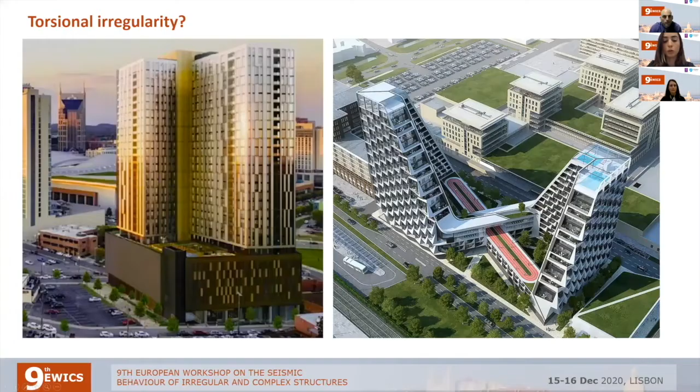Thank you very much. I am Juan Carlos Reyes, associate professor at Universidad de los Andes in Colombia. My other co-authors are Luis Ardila and Maria Paula Moreno, who were my students. I'm going to talk about the evaluation of torsional parameters in seismic code provisions for multi-story and asymmetric plan buildings.

This is work I presented some advances on in the last workshop. This time I'm going to present the full research we did.

So the first question here is how we qualify torsional irregularity in a building like the one shown on the left, or even this one here. What kind of parameter should we use to quantify if this building is classified as irregular in plan, or if it has torsional irregularity?

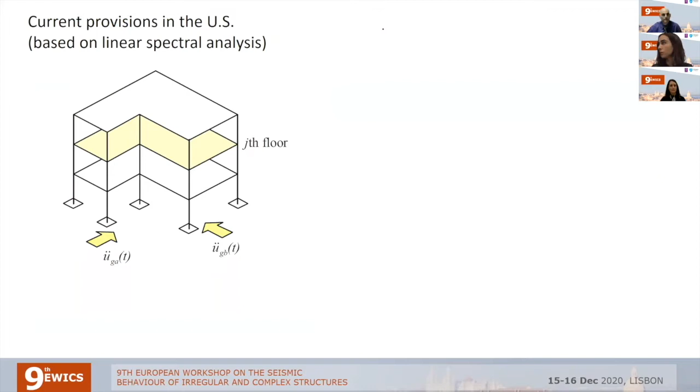Going to the current provisions in the US, those provisions are based on linear spectral analysis. When you have a building like this, you take, for example, the j-th floor shown in yellow, and this is like the deformed shape of that floor. If you plot the next floor, you can measure the drifts between the two floors, and you will see a minimum drift on one side and a maximum drift on the other side.

So you could calculate a factor to quantify the level of torsion. I call this factor alpha, just to put a number and a name to it. It's calculated as the maximum drift divided by the average drift, the average between the maximum and the minimum.

With this factor, the code quantifies the level of torsion using the following ranges. If you are between 1 and 1.2, you will have no torsional irregularity, but just after 1.2, you will have torsional irregularity in this range, and then extreme torsional irregularity for the last range. So this is the kind of decision we can make to quantify the level of torsion in this code.

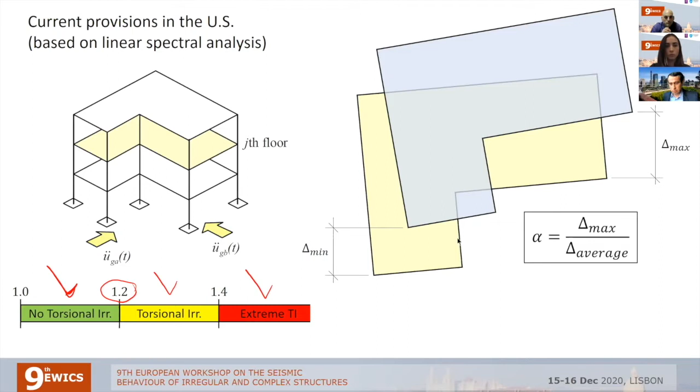Also, the accidental torsion is affected by this decision. This factor AX is defined in the code to increase the accidental torsion. If I plot the numbers, you have 5% accidental torsion for buildings with no torsional irregularity, and then it increases after that. For example, 1.4 alpha will be associated with 6.8% accidental torsion. That's a torsion we need to add to the other torsion the building already has.

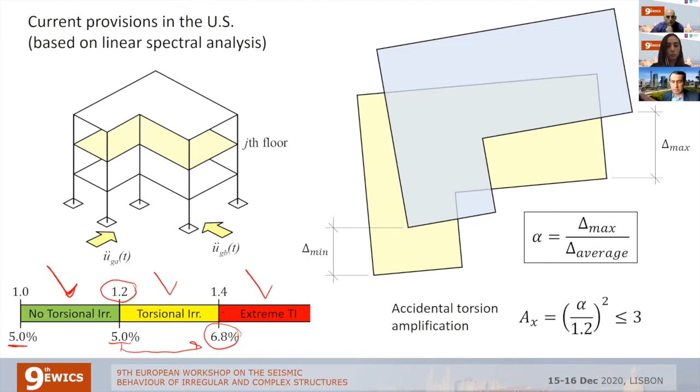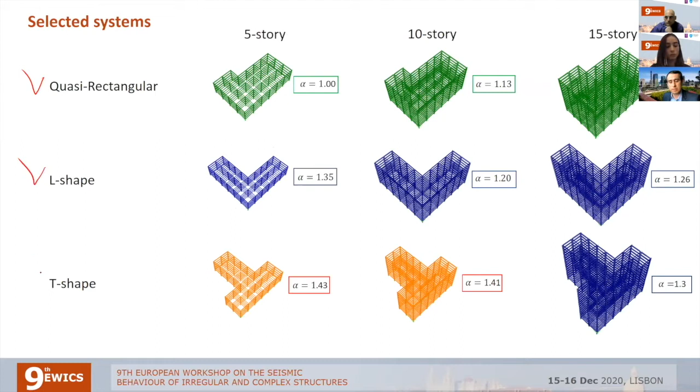To evaluate this parameter, we selected the buildings shown here. We have some rectangular buildings, some L-shaped buildings, and some T-shaped buildings of 5, 10, and 15 stories.

Here I'm writing the alpha number. As you can see, all the buildings in the first row don't have any torsional irregularity, but the buildings in the second and third rows have some, and especially those at the bottom, we have extreme torsional irregularity with an alpha factor larger than 1.4.

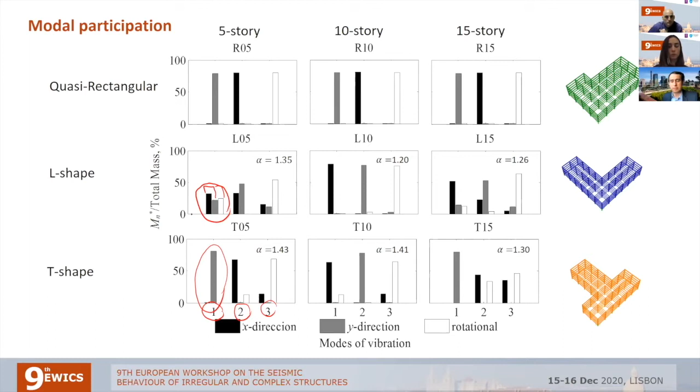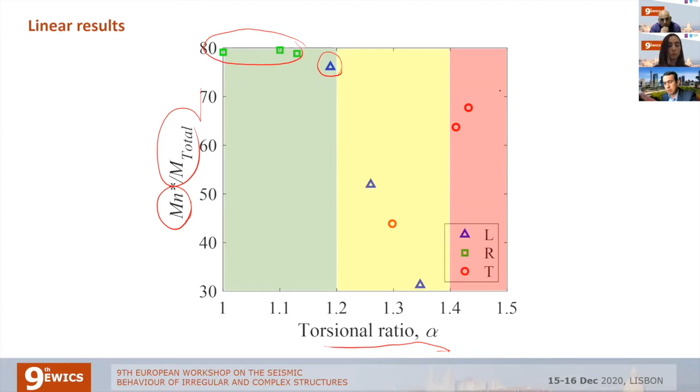So first we try to use this result as a parameter to quantify torsion. Plotted here is the first mode effective mass against the total mass, on the horizontal axis is the alpha factor. You will see that the rectangular plans are well aligned here with very large participation mass, and even this L-shaped building with no torsional irregularity is still okay. But when you go to the other buildings, you will not have a clear trend. You will see somehow that participation is lower for the first mode, but it's not a very easy parameter to evaluate the level of torsion in a building.

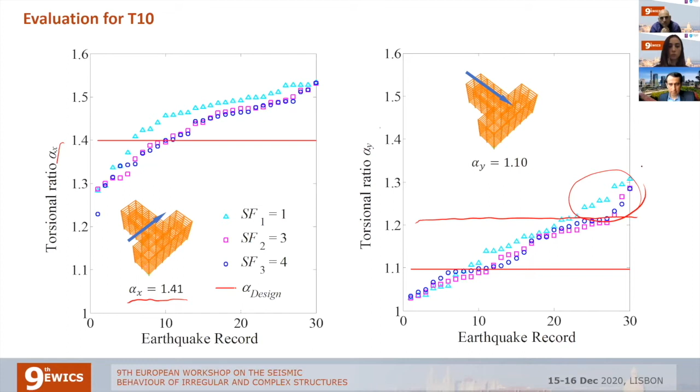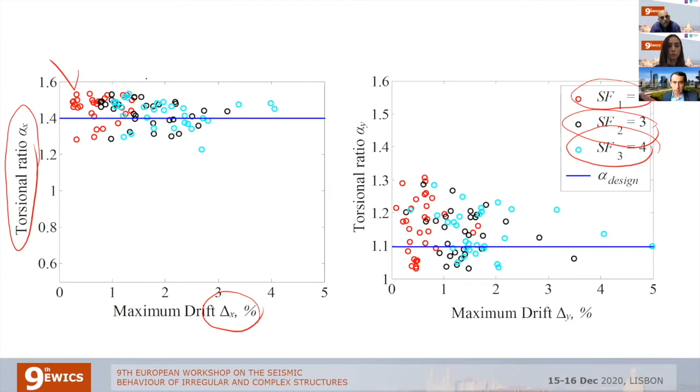So here I'm also plotting the same information for the other direction. In this one we have a little more dispersion, but again you will see that the values cluster around the one calculated using linear analysis.

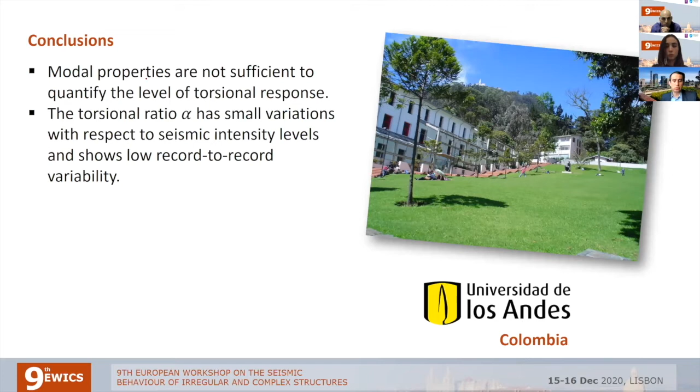So in conclusion, modal properties are not sufficient to quantify the level of torsional response, and the torsional ratio alpha has a small variation with respect to seismic intensity level and shows low record-to-record variability. Because of this, we consider this torsional ratio alpha adequate to identify plan irregularity of multi-story buildings. These are the main conclusions. We have done this for all the buildings, but only showing here the T10, which is one of the most critical ones. Thank you very much for your attention.

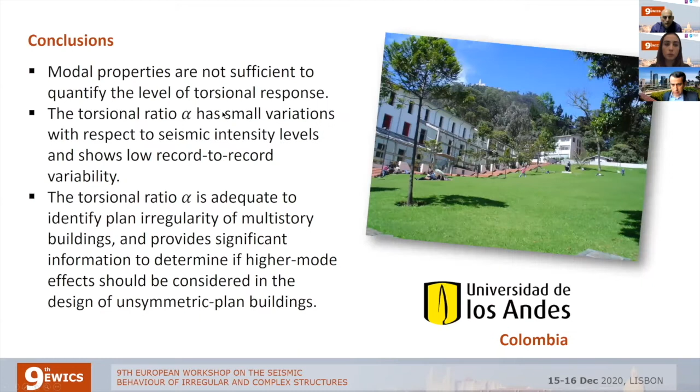Yeah, the structures are nonlinear. Like you see, okay, we here at the beginning, let me go here. We try different intensity levels, so we try a scaling factor of 1, which is mostly linear, but then this scaling factor of 3 and 4 will take the building very far into the inelastic range.

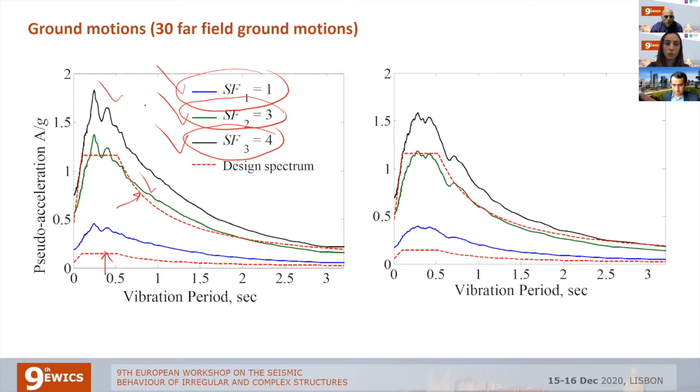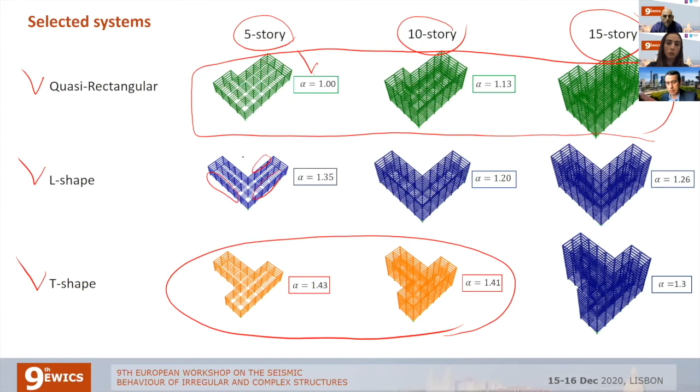So how is the strength distributed in these cases of nonlinear? The buildings are steel frame buildings, and they have some frames in the perimeter, as is usually done in the US. So all the plasticity comes from the yielding of the frames, especially beams and some columns in those frames. Okay, thank you. Perfect.

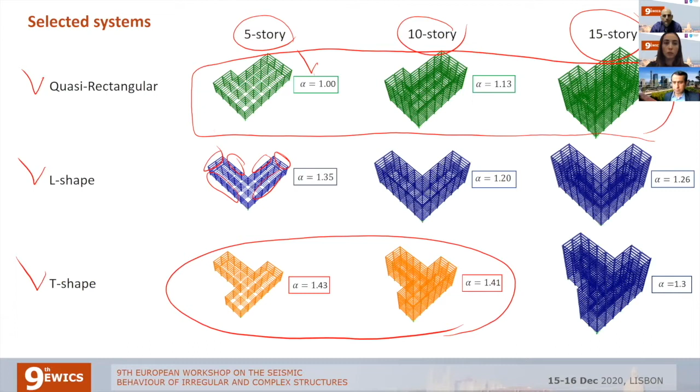And for these buildings, you only consider the irregularity in plan. You didn't consider the irregularity in height, or did you model the infills for these case studies?

Yeah, in this case, we were interested only in torsional irregularity in plan, so it's restricted to in plan. That's why we are using this alpha parameter here, which only includes the level of torsion in plan. And we are not including the effect of the infills. Usually in the US, at least, these steel buildings have partitions that are not fragile, so we are not including that effect here.

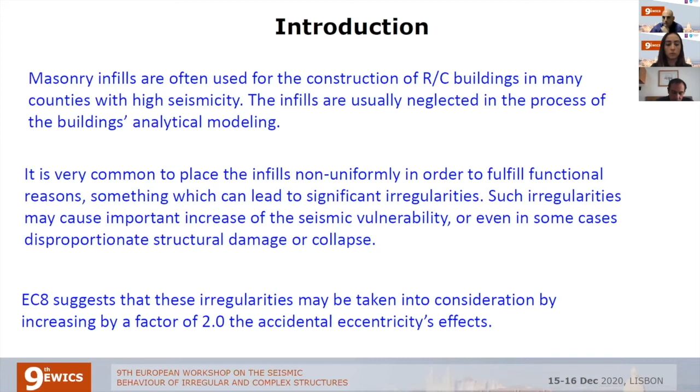In the present paper, the need to increase accidental torsion in nonlinear seismic analysis as a parameter to capture the effects of infill irregularities is further investigated through the evaluation of a multi-story 3D RC building with irregularly placed masonry infills. The seismic assessment of the building is carried out using the nonlinear pushover analysis according to the Eurocode 8 provisions.

Two different structural models are investigated: a model taking into account the masonry infills as diagonal struts, and a model without taking into account the infills, but increasing by a factor of 2 the accidental eccentricity as Eurocode 8 proposes. Then a comparison between the two models is carried out in order to examine the effectiveness of the accidental eccentricity in capturing the effects of irregular infills.

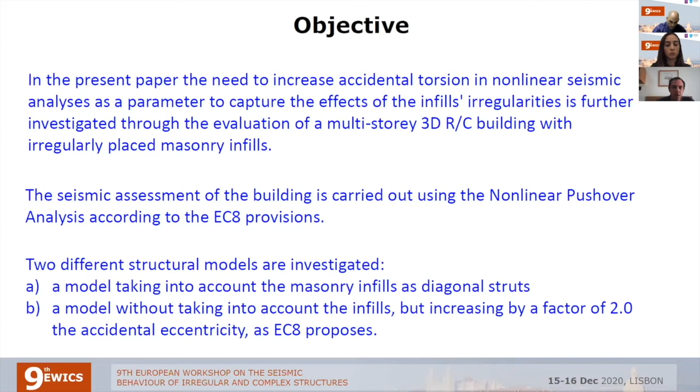The main load-bearing structure consists of beams, columns, as well as a reinforced concrete core wall. The foundation of the building consists of individual footings and connecting beams.

For the modeling of the building, all basic recommendations of Eurocode 8 were taken into account, and the building was analyzed by means of nonlinear pushover analysis as defined in Eurocode 8. In order to model the nonlinear behavior of the structural elements, plastic hinges were placed at the column and beam ends as well as at the base of the walls.

The properties of the plastic hinges were defined according to the code provisions of Eurocode 8 and the Greek Code of Interventions, KAN.EPE. The masonry infills were modeled according to the provisions of the Greek Code of Interventions. More specifically, each infill was modeled as an equivalent hinged diagonal strut in compression with a given width. The mechanical properties of the infills were estimated using the mechanical properties of the bricks and mortar and taking appropriately into consideration the method of masonry construction.

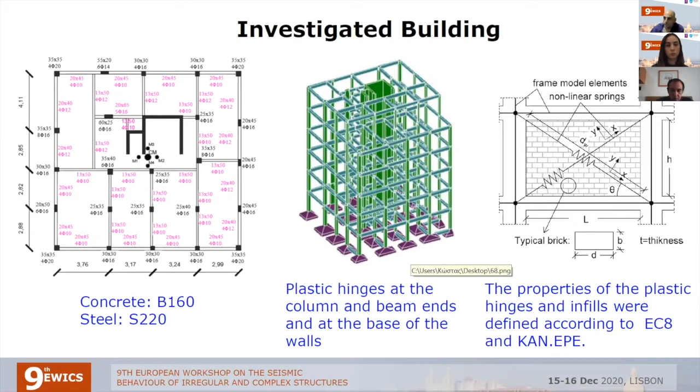The building was assessed using the non-linear pushover analysis according to the Eurocode 8 provisions. The following different structural models were investigated. First, a model without taking into account the infills and using the value of the accidental eccentricity proposed by most seismic codes, that is 5% of L, where L is the floor dimension perpendicular to the direction of seismic action.

A model without taking into account the infills but increasing by a factor of 2 the accidental eccentricity. Two models with masonry infills distributed irregularly in plan in such a way that asymmetry along the x-axis is caused, and taking into account the infills effect as diagonal struts according to the modeling procedure presented.

And finally, two models with masonry infills distributed irregularly in plan in such a way that asymmetry along the y-axis is caused, and taking into account the infills effect as diagonal struts according to the modeling procedure presented.

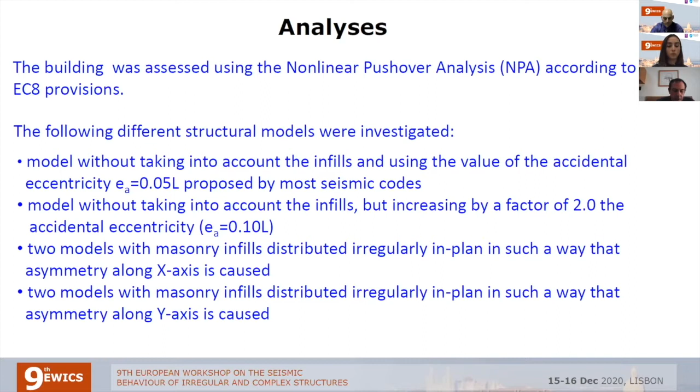The above structural models were subjected to nonlinear pushover analysis, and all the structural elements of each model were assessed for bending and shear according to the provisions of Eurocode 8.

For the nonlinear pushover analysis, the following assumptions were made: limit state of significant damage, knowledge level of normal knowledge, horizontal elastic spectrum as defined in Eurocode 8 for PGA of 0.24g, two different lateral load patterns, uniform and modal, target displacement according to Annex B of Eurocode 8.

Assessment of the capacity of each structural element according to Annex A of Eurocode 8, Part 3, and the combination of the effects of the seismic action components according to the Greek Code of Interventions.

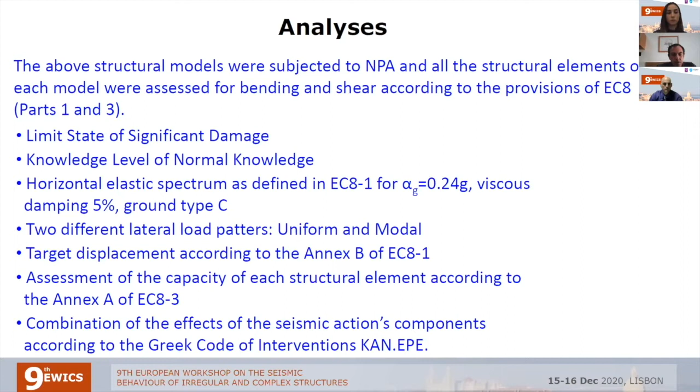However, the increase is rather small. The analysis revealed that the number of shear failures is much larger than the number of bending failures, something which was expected since the investigated building was constructed according to old codes without seismic provisions for capacity design.

Practically no difference has been noticed between the models with small and large infill irregularities. Now, considering the comparison between the models with accidental eccentricity of 5 and 10%, it can be seen that when the accidental eccentricity is multiplied by a factor of 2, as Eurocode 8 proposes, the damage is more severe. However, the difference between the two models is rather small.

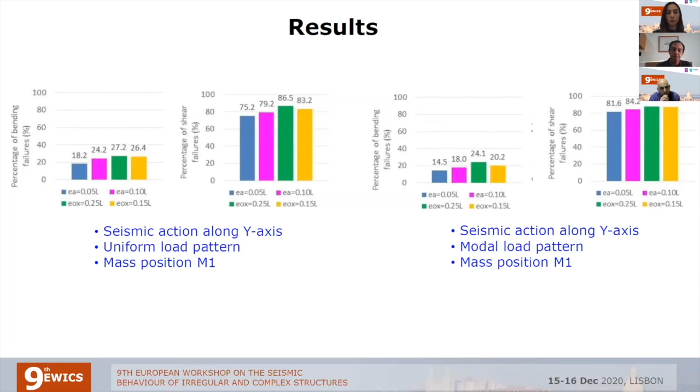Now, based on the results of the study, the following general conclusions can be drawn. In most cases, the consideration of the irregularly distributed masonry infills in the structural modeling leads to a larger number of bending and shear failures. However, the increase is rather small. Moreover, practically no difference has been noticed between the models with small and large infill irregularities.

The increase of the accidental eccentricity by a factor of 2, as Eurocode 8 proposes, leads to more severe damage for the studied building. However, this provision of Eurocode 8 was proved to be effective up to a point, since it failed to capture adequately the effects of the irregularities in the infill distribution for the investigated building.

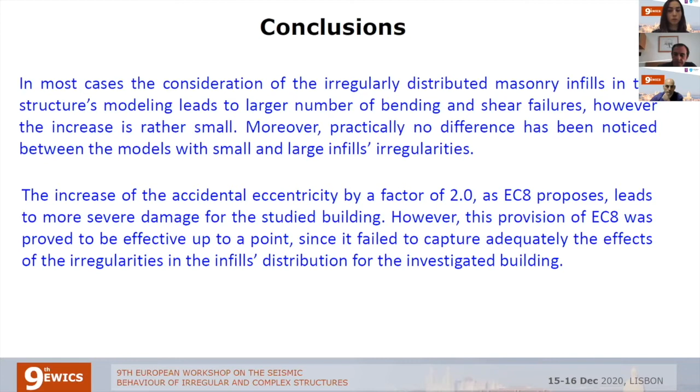Thank you very much for your attention.

Thank you for the presentation. I have not seen any questions in the chat, nor anyone raising his hand or her hand. Does anyone have any questions about this presentation? If not, then I will ask a quick question. Yes.

So the structure you considered is highly irregular in plan. How do you think the conclusions would change if the structure was symmetric, for example? Because the accidental eccentricity doesn't add too much eccentricity to this specific structure, whose built-in eccentricity is very high. But a small eccentricity added to a structure that is symmetric, for example, may change the results more considerably.

Yes, you're right, it depends on the structural eccentricity. But I don't know what would be the result in this case. I think that the problem is very much parametric, so much more research must be done in order to come to reliable conclusions, because the distribution of the masonry infills is chaotic, I think it can be very chaotic.

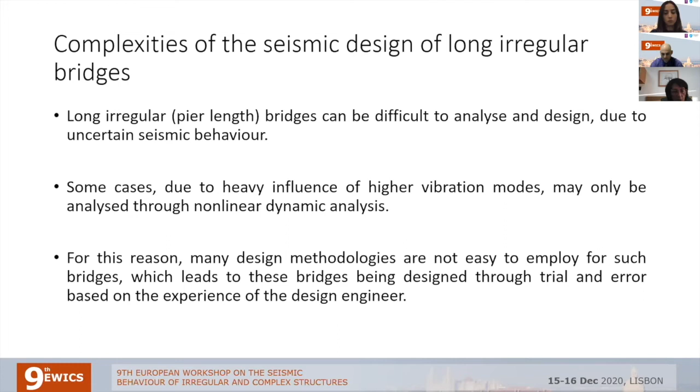When designing a structure, one attempts to optimize some aspect of the structure, even if implicitly. Implicitly we attempt to either maximize resistance, but without using too much material, and usually these two and many other possible objectives are done implicitly and sometimes even explicitly when designing structures. So it makes sense to apply multi-objective techniques for structural optimization due to that implicit goal.

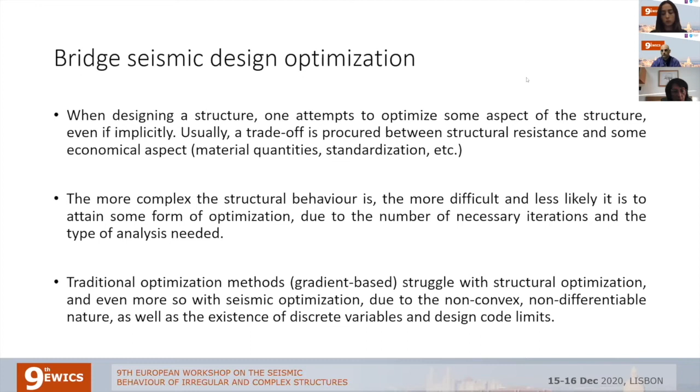So why genetic algorithms for seismic design? In essence, genetic algorithms are meta-heuristic methods that allow achieving optimization, and are good to apply to seismic design and structural design, because

traditional optimization methods aren't usually very good to apply due to the non-convex and many times discontinuous nature of the optimization problem. And these types of algorithms have no trouble with discrete search spaces due to discrete variables, due to non-convex shapes of the optimization problem.

And so this can be applied, and they are especially valuable for multi-objective problems where you want to obtain a trade-off between different objectives. So if you want to optimize at the same time towards performance, but also towards cost, these two objectives are not easy to optimize at the same time. Usually one contradicts the other. And so these types of solutions are useful in those cases.

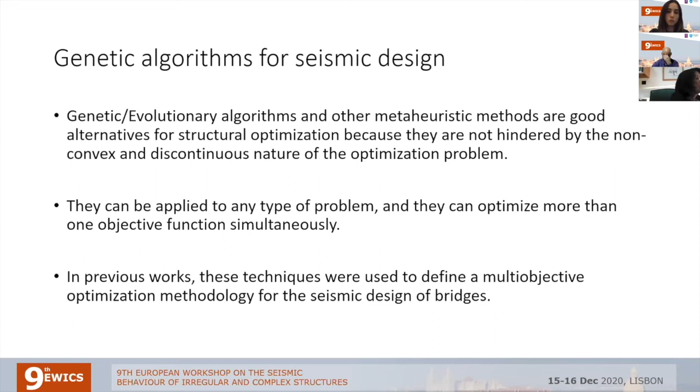So in this case, what we did was we applied these optimization techniques to a case of a long irregular bridge, and this type of bridge is particularly complex because they have short central piers, and they tend to have a transverse horizontal displacement profile that is different than the usual parabolic first mode shape, and so they have a lot of influence from higher modes.

As said in this work, the objective is to apply these techniques and use the search history for knowledge or rule extraction. And the decision variables, or rather the design variables used in this instance were pier diameter, flexural steel reinforcement, and pier deck connection. And what was done was dividing the piers into groups that were somewhat similar in terms of pier location and pier size. And so those piers, in those four groups, have the same design.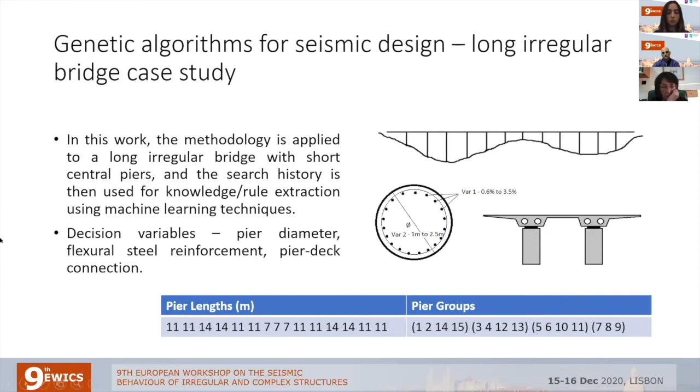And then the optimization algorithm, what it will do, it will test a lot of different combinations and a lot of different solutions of bridge instances with this initial typology, and will compare them based on two fitness functions that are on the one hand performance, and the performance here is the comparison of the concrete admissible strain at each pier versus the concrete strain that sets in at any point in time of the seismic action.

So the method of analysis was nonlinear dynamic analysis with real strong motions, and to deploy this, OpenSees MP was used, and the reason why the OpenSees MP, the variation for parallel processing, was used was exactly due to the huge amount of analysis that had to be performed to obtain this final result.

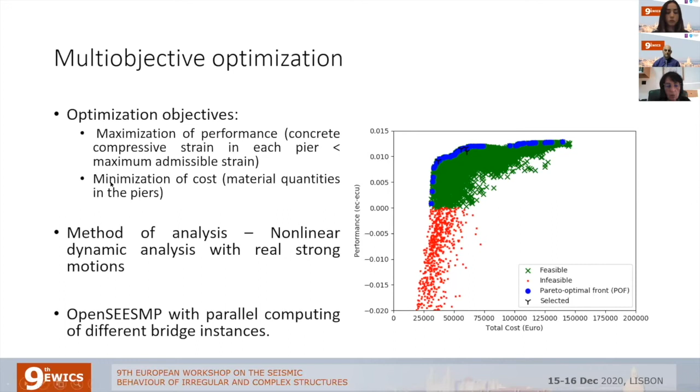To get a grasp on why this is interesting, particularly for nonlinear, irregular structures, and in this case long irregular bridges: many times when designing we don't get the opportunity to search a lot of different variations in the design, and this allows us to catch different schemas for design.

We can see that there were two ways of designing this bridge that gave good results. We can either decide to place fixed connections in the middle short piers, or do the other way around, with monolithic connections on those piers and have the others fixed, playing with the amount of flexural steel placed in each situation.

We have two different approaches that basically arrive at a viable solution. This is interesting because it allows us to explore other solutions that are not as obvious, walking away from what is expected, and this allows us to gain insight many times on what is behind certain structural behaviors.

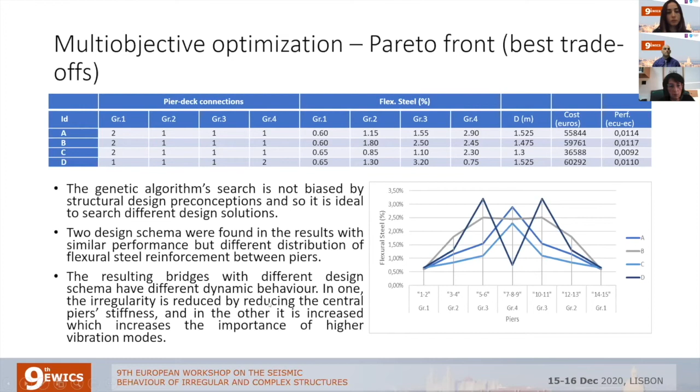Going further than only analyzing the solutions given from the Pareto set, one can do something more interesting: after these analyses we have tens of thousands of bridge instances that were tested. Some failed, some managed to be feasible, and if we apply, for example, classification trees...

We are able to see which variables or features are more significant for the resistance of the bridge, and in which cases. We can clearly see which characteristics are more significant for knowing if a bridge is going to be feasible or not.

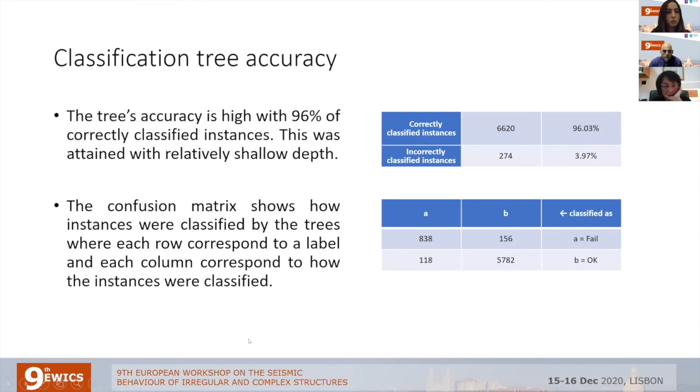This essentially shows that the features that were generated and that the algorithm then selected are actually capable of accurately separating the two labels of pass and fail.

So thank you for your attention.

Thank you very much for the presentation. We don't have too much time. If anyone has a quick question - no.

Okay, so we can pass on to the last paper. It will be a video presented by Grigoris Manoukas, presenting the paper 'The Slenderness of Building in Plan as a Structural Regularity Criterion.'

Of the slenderness of floor slabs in order to categorize buildings as being regular in plan. This criterion aims to ensure that the floor slabs behave as rigid diaphragms and are able to transmit and distribute the lateral loads to the vertical structural elements.

The objective of the present study is the evaluation of this structural regularity criterion as adopted by the current version of Eurocode 8 and as revised in draft 3 of the new version of the code.

The deformability of floor slabs depends on several parameters, such as the slenderness of the plan, the slab thickness and shape, the configuration of the lateral load resisting system, the relative stiffness of the vertical elements to the in-plane floor stiffness, and the size and distribution of openings.

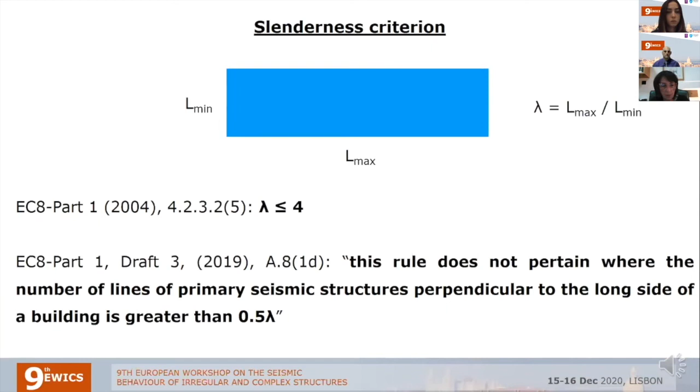In order to evaluate the efficiency of the aforementioned criterion, a total of 36 reinforced concrete buildings with various floor plans, number of stories, and structural configurations is examined.

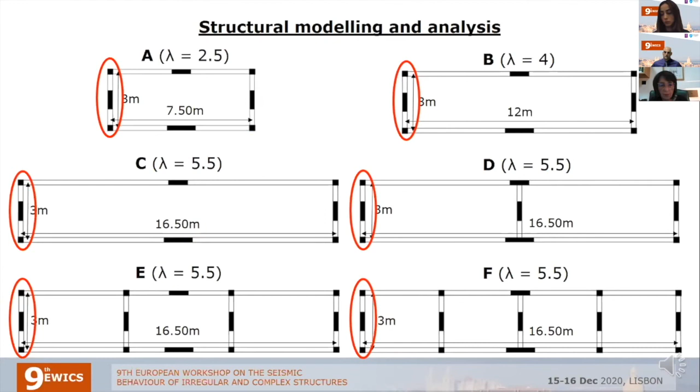Each building is characterized by a string symbol comprising one letter and two numbers separated by a dash. The letter A to F indicates the floor plan of each building. The first number, 2 or 4, indicates the number of stories. The second number, 1, 2, or 10, is a modification factor used for the amplification of stiffness of the dual plane lying at the left side of the plan. For example, the symbol F2-10 corresponds to a 2-story building with floor plan F, in which the actual stiffness of the vertical components lying at the left side of the plan is multiplied by 10.

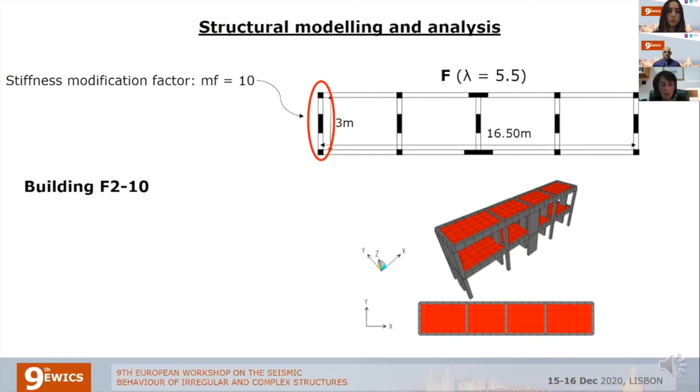The thickness of all slabs is equal to 15 centimeters, which is the usual dimension in common buildings in Greece.

For each building, 2 alternative options for the simulation of their in-plane stiffness are adopted. Firstly, rigid diaphragms, utilizing the relevant feature available in the software used. The story masses along the horizontal axis, as well as the story mass moments of inertia around the vertical axis, are concentrated in the geometrical center of the plan.

Alternatively, 4-node shell elements are used, which is considered the exact modeling option. The story masses are uniformly distributed on the slabs. The dimension of the square-shaped shell elements is 75 centimeters, although a coarser discretization mesh would be adequate for the estimation of horizontal displacement. This choice ensures that the nodes of the discretization mesh include all connection points of vertical structural elements with the diaphragms.

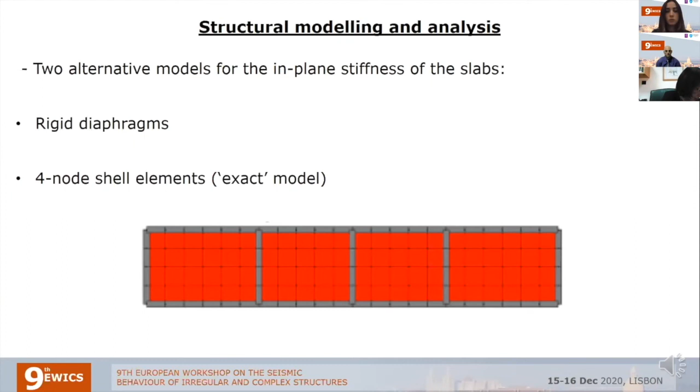In order to identify whether the rigid diaphragm assumption is reliable, the relevant criterion adopted by Eurocode 8 is applied. In particular, the diaphragm is taken as being rigid if, when modeled with its actual in-plane flexibility, its horizontal displacements nowhere exceed those resulting from the rigid diaphragm assumption by more than 10%.

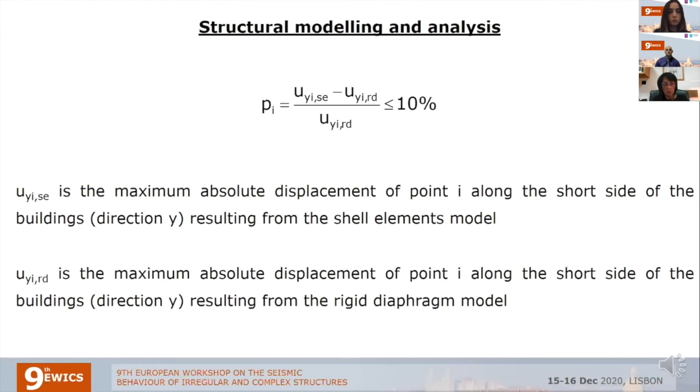For the application of this criterion, the percentages of displacement exceedance, PI, for each point I of a diaphragm are calculated from the relation shown. The maximum value of PI for all points of a diaphragm, max PI, is compared to the limit of 10% prescribed by Eurocode 8. A negative value of max PI means that the rigid diaphragm assumption is conservative. A positive value of max PI below or above the limit of 10% means that the rigid diaphragm assumption is acceptable or unacceptable, respectively.

The displacements of each point of the diaphragms are calculated by means of the modal response spectrum analysis method. Given that, according to the aforementioned criterion, only the relative values of displacements resulting from the two alternative models are important, the use of a typical code response spectrum is not necessary.

Hence, in the framework of the present study, a single response spectrum with a constant value of spectral acceleration is applied. The seismic excitation is considered to act concurrently along two orthogonal directions, and the directional combination is conducted using the square root of the sum of the squares rule. For rigid diaphragm models, all vibration modes, 6 or 12, are taken into account, while for shell element models, the first 12. In all cases, the modal superposition is conducted using the complete quadratic combination rule.

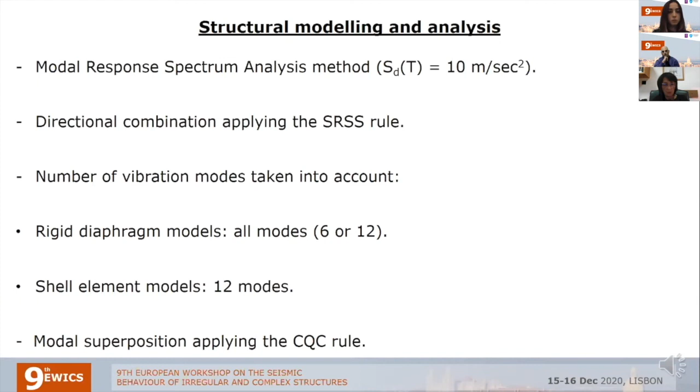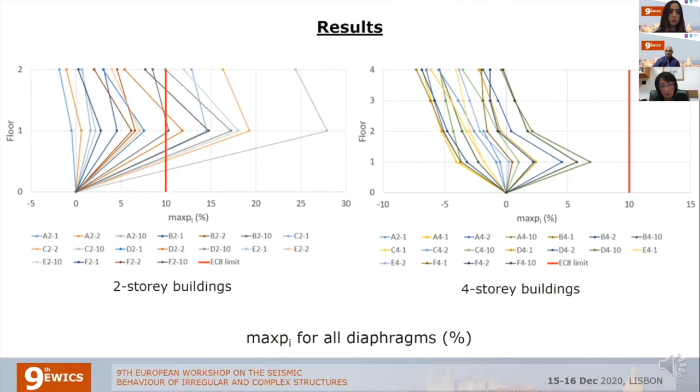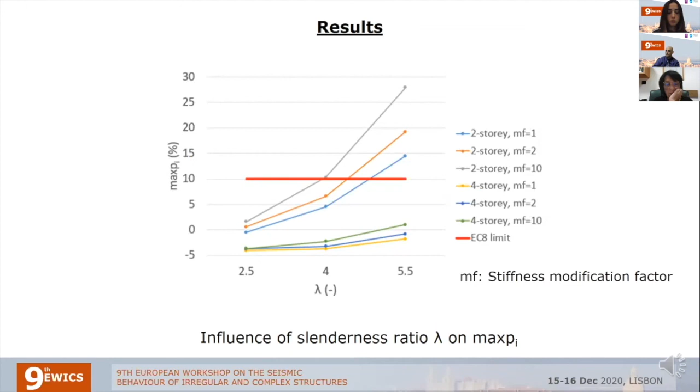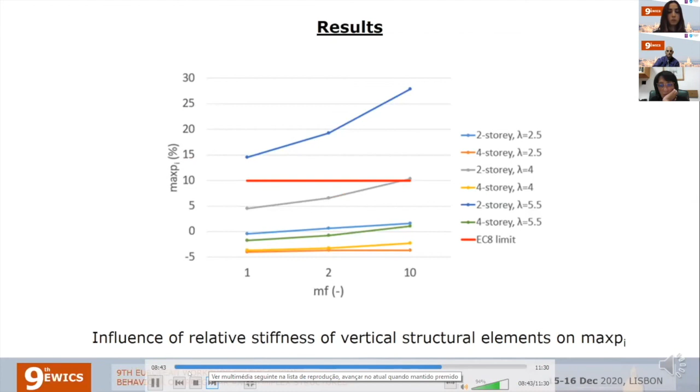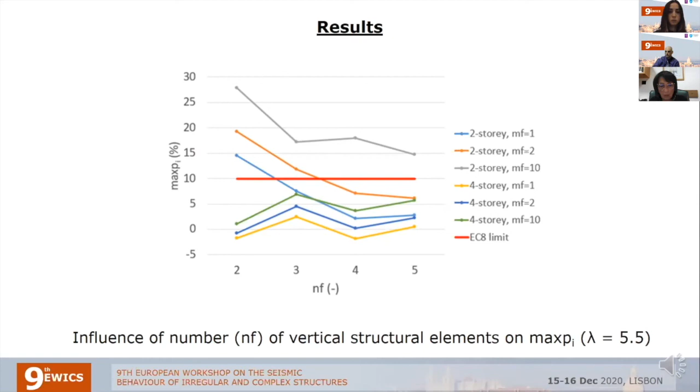The whole study leads to the following conclusions. Apart from the slenderness ratio, the in-plane behavior of slabs depends also on many other parameters, such as the number of stories, the number and relative stiffness of vertical structural elements, and others not examined here.

The rigid diaphragm assumption tends to provide more conservative results for the higher floors of each building than for the lower ones. It seems that the rigid diaphragm assumption is conservative for buildings with medium and high number of stories, regardless of the slenderness ratio. Hence, the relevant regularity criterion probably should not pertain for such buildings.

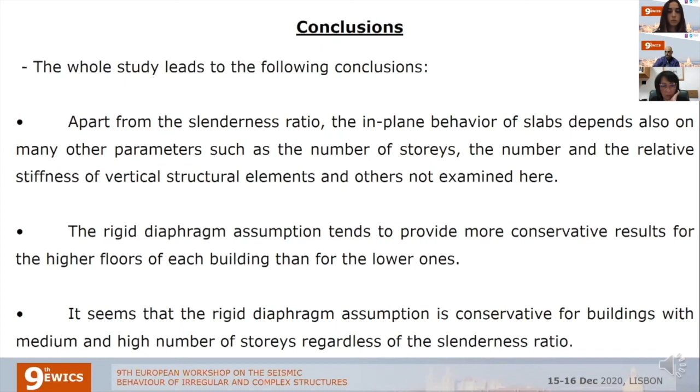The compliance with the upper limit of slenderness ratio prescribed by Eurocode 8 does not ensure the diaphragmatic behavior of the slabs in case of major difference between the stiffness of vertical elements. This indicates that a possible revision of this limit should be examined.

The provision of draft 3 of the revised version of Eurocode 8, which specifies that the slenderness criterion does not pertain where the number of lines of primary seismic structures perpendicular to the long side of a building is greater than half of lambda, is not justified by the present study. Hence, a possible elimination of this provision should be examined.

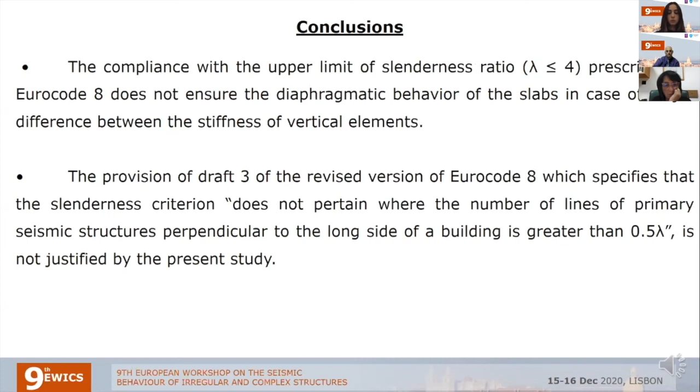I believe nobody has questions. Nobody raised their hand or wrote in the chat. The presenter is not here, but I believe the second author, Asimina, is here, and I'm not sure if she can answer. If not, I think you can also send an email to the author. The organization committee will provide the...

Can I ask one, just a comment based on the final conclusions? Probably Asimina can add some more things. So clearly, based on your studies, it seems that you give some recommendations for the project teams who are dealing with the development of this second generation of codes. I don't know if you, Asimina, would like to comment on this and explore a little bit this main conclusion that could be very important for the project teams.

The slenderness of the slabs is very important for choosing the method of analysis, whether the structure is regular or irregular. These simple numerical examples show that this slenderness criterion is not valid for the structure examined, and there are many other structures we have examined where this criterion is not valid, because it depends, as we have said, on many other parameters: the number of stories, the width of the floor, the openings, the stiffness of the vertical structural elements, the position of these elements in plan, and so many other parameters. So we can't state this criterion so simply.